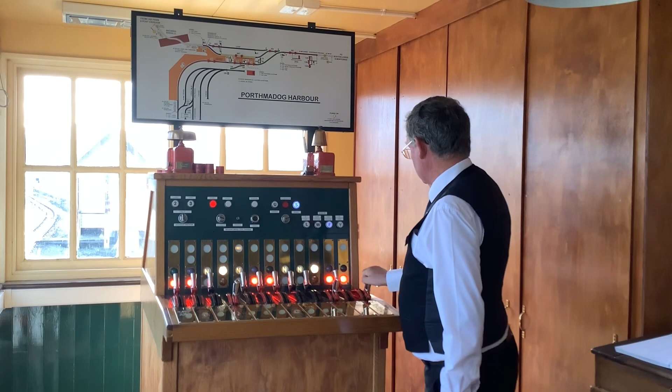Here's an L frame, miniature lever frame, all electric lock. There's no mechanical locking in it. So where on most lever frames, especially full-size lever frames, there's mechanical locking between the levers, on this frame all the locking between the levers is done electrically.

It's a 12 lever frame, part of the frame from Darlington North, which is a very big frame. We got donated it by Peter Burke. Actually turns out that it was 3 separate bits of the frame. The top bit, the front bit and the back bit were from different parts of the frame. But it's made by Westinghouse and it's made out of constructed parts, so it's kind of like a giant Lego set. You can assemble it in whatever configuration you want.

So as on any normal lever frame, the red levers are the signal levers, the black levers the point levers, and then we have one brown lever which is for releasing what we call Spooner's ground frame down at Spooner's. The points here are all electrically worked. And the points down outside Spooner's are so far from the box, and with people on the platform and trains in the platform, there's no way we could see anyone standing in the points. So the points down there are worked by the loco crew and we just give a release to the ground frame.

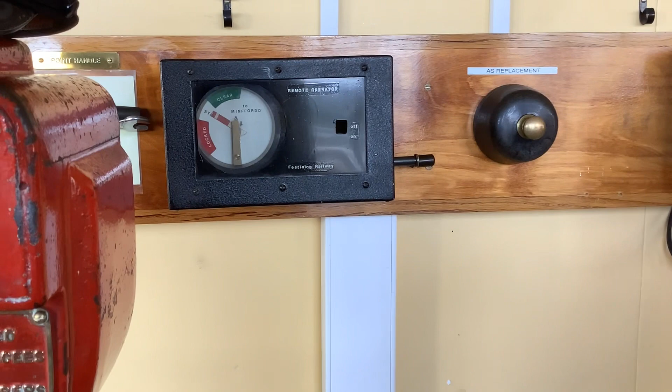The controls for the ETS are traditional overhead copper network communication. So there is overhead cadmium copper lines from Boston Lodge to Minffordd, and there's underground cable across the Cob. And then, rather than it being signalman operated, because the FR's always disliked signalmen because they are difficult to get and expensive, as much as possible the railway is designed for train crew working.

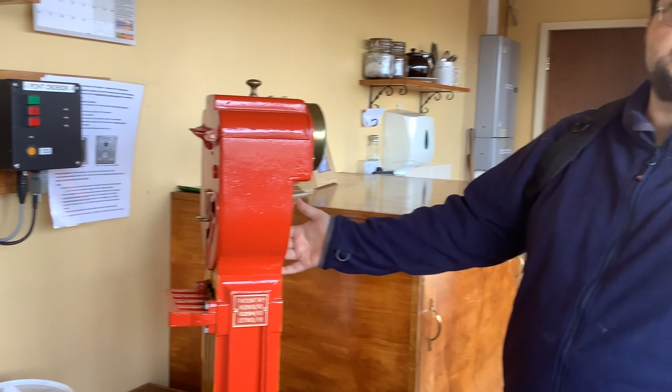So can I wind your remote operator? Yes. So you wind the remote operator, and it gives you an indication as to the state of the sections. It's locked at the moment. And that's how we've done it for the last umpteen years. And then the instrument for the Welsh Highland Railway to Pont Croesor is effectively the same style and principle of operation. It's just the communication between here and the next block post is digital, using a system called micro ETS. So it's got a push button panel instead.

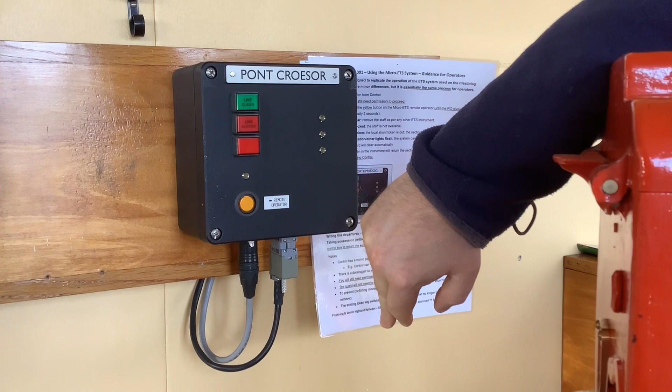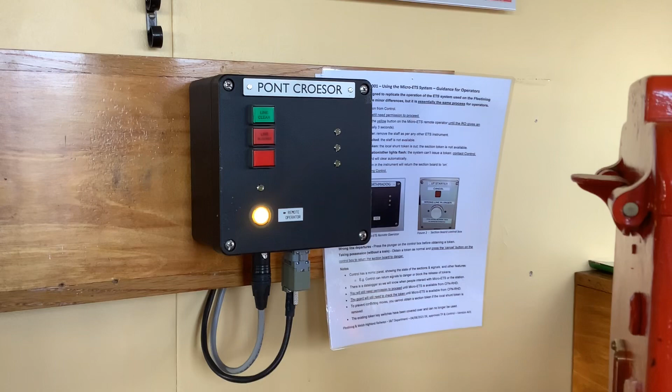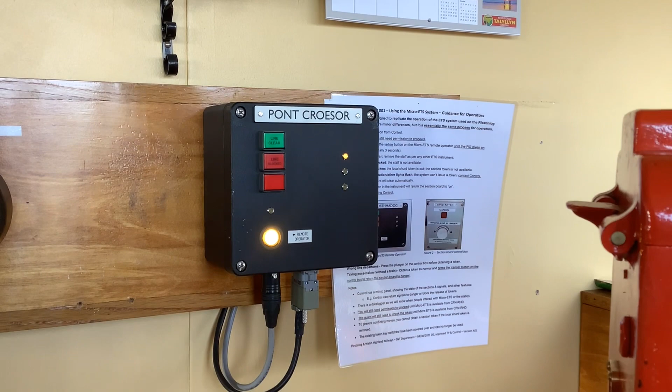So if you press that button, 3 seconds. Is it 3 seconds? It's been a while since I had to do this. And it's not saying anything at the moment. Do I need to press it again? Wait, there you go. Something broken. It should say line blocked, but it isn't. There's a communication error on that section.

So this is the repeater panel for the micro ETS system. Just take the phone out of the way. If I go there, I can get around it. We'll deal with this in the edit.

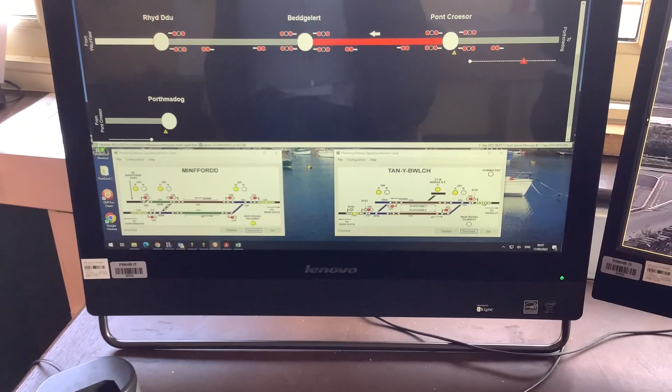So you have, is it Tan-y-Bwlch? That's Tan-y-Bwlch and Minffordd. Those are the repeater panels for the automatic stations. Right. So that's a traditional RRI system, but Tim, when he was a student, built a monitoring system, for which he's then built a server-based version of the software, so you can actually see what's going on. You can play it back, so for fault finding it's helpful.

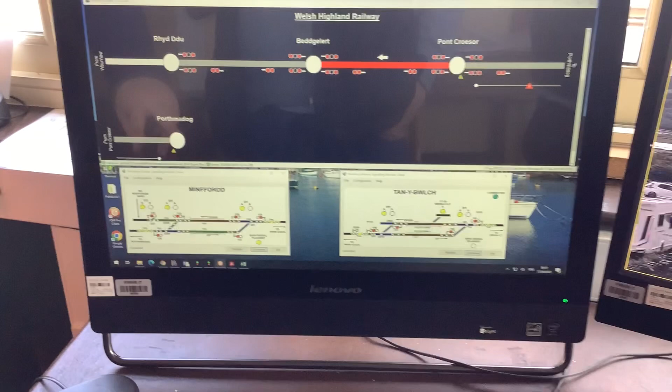So those are just the mimics of what's happening. You can see everything; they don't have to be open. It's literally the station works itself. Right. It's worked off track circuit operation and removal of the staff. And it's there from the 1980s. They're extraordinarily clever. And then this is what micro ETS is doing. That's the token sections of the Welsh Highland. Because it's a digital system, you can build a monitoring system into it.

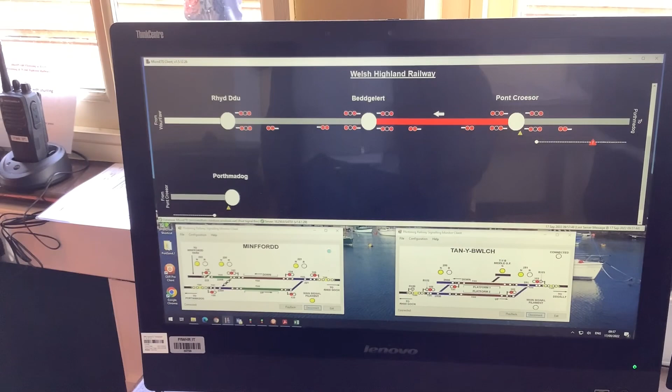Other things to draw your attention to on the block shelf. This is an override key for Britannia Bridge, which a train struck. In the event of a fault with Britannia Bridge, you can basically override the track circuit. And then there's a relay room power indicator, and this puts the advanced starter back. You can also put the advanced starter back by putting the staff back into the instrument. It puts the signals back. And you can also do it if you're trying to token balance while the train's trying to leave. So we don't do that.

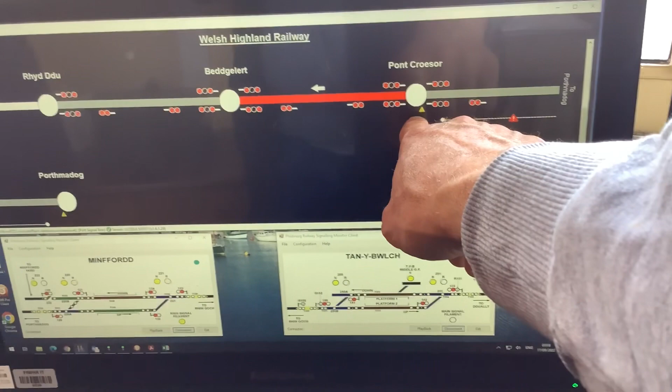So that's showing section occupancy, but it's also showing the signals at Beddgelert and at Pont Croesor, so they're at danger at the moment. So these are the signals that were technically coming into the other track, and those are the 2 tracks showing out. Yeah. Yes. They are slightly odd symbols because the ladybird symbols are a red light top and bottom.

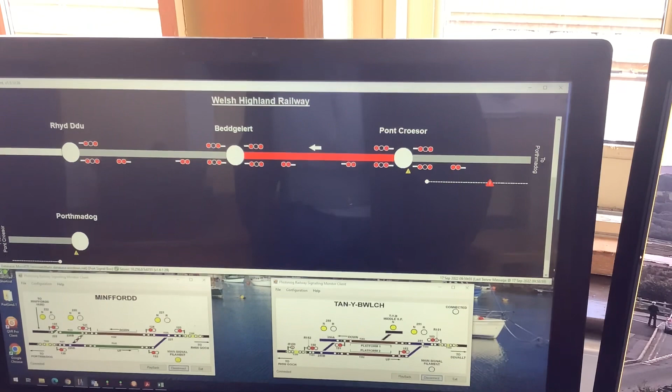Yes. So that's showing you that there's some communication error on one of the 2 pairs, and the caution is, I suspect that means that it's lost comms for a bit, right? So let's hope that there's not a train that wants to come back and use that section. Otherwise, Tim's going to be getting the magic key out and doing things. No.

Back on the inside. Phone control to let them know that it's back in. Signalbox, Minffordd token's back in. Thank you. Cheers.

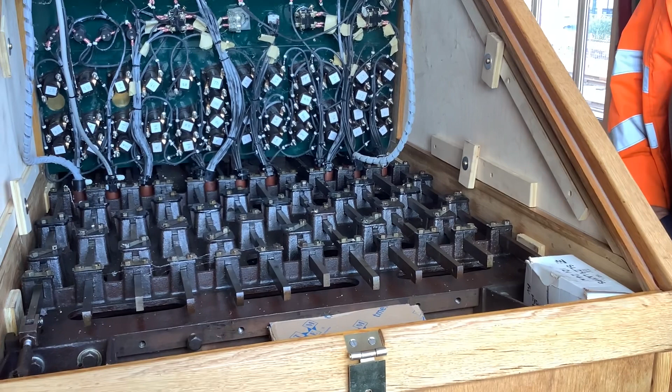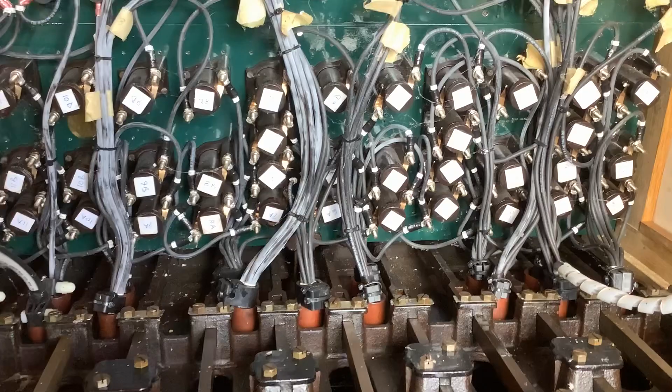See what you mean about having to sit the contacts on the end. Yeah. Yeah. Do you want to take a look? I'm not going down there. You know, you might stay there.

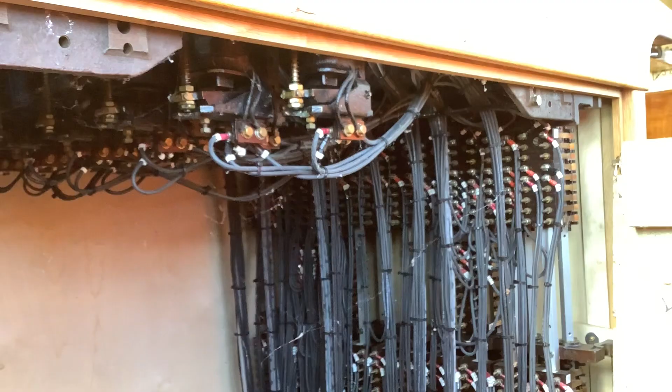Peter said we don't have both electric locks that you'd normally have on the frame. You'd normally have the track circuit lock and the interlocking lock. Yeah. And the interlocking lock would be in a red can to show that, because they used to have somebody in the box who could go and release the track circuit lock in the event of a problem, but the red can said that's the interlocking lock, you can't pick that.

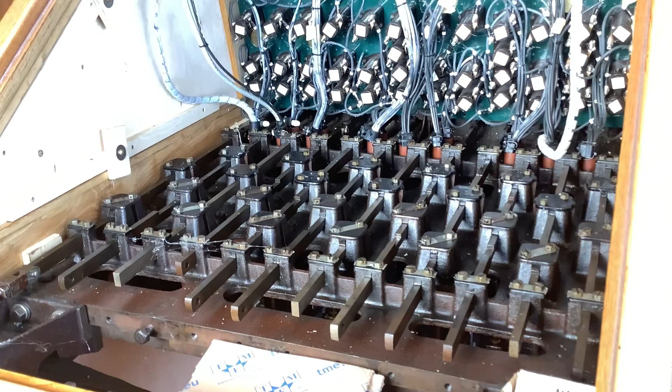We decided, when we went to having just one lock, we wouldn't fit the red cans to them because it's already in a lock cupboard that only S&T can get to. And if you do have to pick a lock and disarrange, you're talking to control, the A-class controller, anyway, so what's the problem? To set the points for the Welsh Highland platform, we've got detection on them, at 10 and 12.

The guy who came up with this was a guy called Alan Skellen, who was one of the S&T staff here for many years. He started on the project, and unfortunately he died right at the beginning, which was terrible and inconvenient because we had to do a lot more work, because he had so much expertise that we could have brought to the thing. He died really tragically for want of a carbon monoxide detector. It was really very sad.

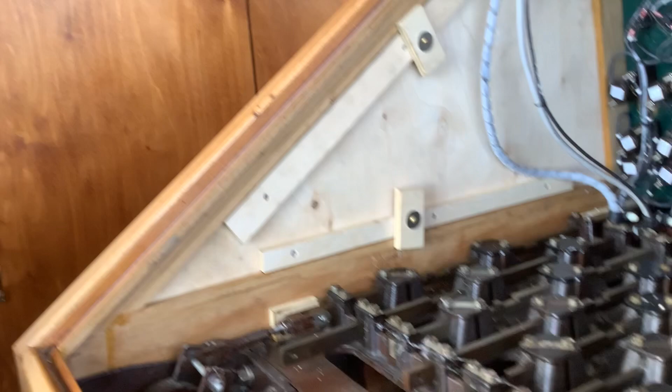So I like to think of this frame as actually being, we're going to get a brass plaque for it, I've just never got round to it, which is stupid really. But this is sort of a memory to him because he was the prime mover behind this, and when he died it became Peter who did an awful lot of the work and an awful lot of the painting, and in fact quite a lot of the frame existed in his garage for a very long period of time. Well, Alan was refurbishing. Cobwebs here.

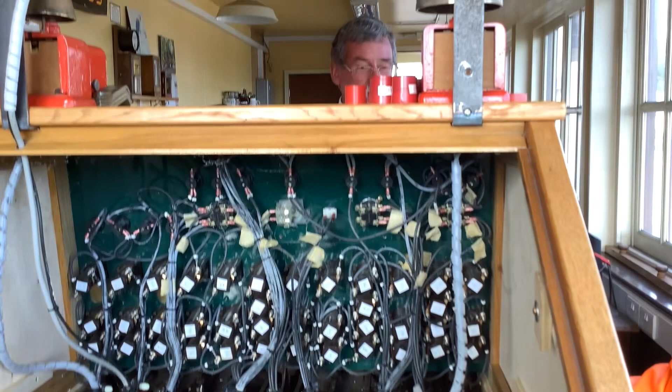Alan was refurbishing the frame in the workshop or one of the sheds over at Boston Lodge, but it wasn't very watertight. It wasn't very warm. Didn't have much good lighting. So he took over my garage in Porthmadog. I was just round the corner from him. Got heating and lighting and whatever. So that was quite fortuitous.

He'd got to the stage where he totally disassembled the frame and had started refurbishing some of the pieces when unfortunately he died. So I took over the rebuilding of the frame after that, all done in my garage. Mr. Wilson.

Draw lock. Leave it open there so I don't lose it. Check the starters cleared. And they clear the starter signals. Would you mind terribly if I slightly corrected you there, Sam? Check the starter should have cleared. It doesn't tell you it actually has.

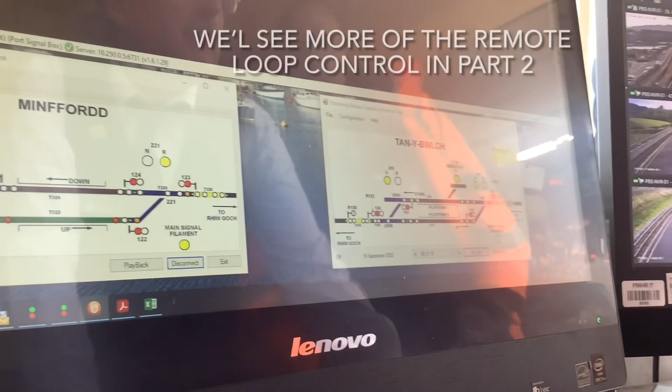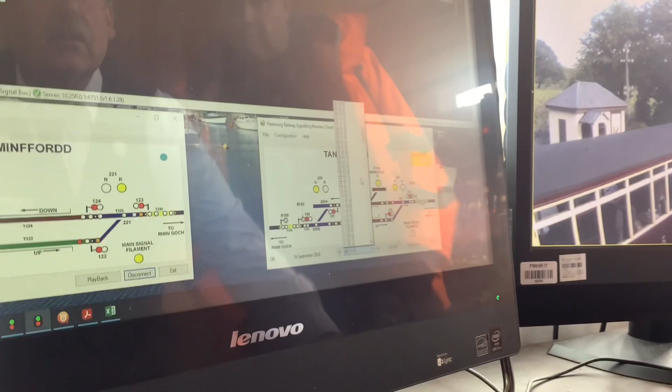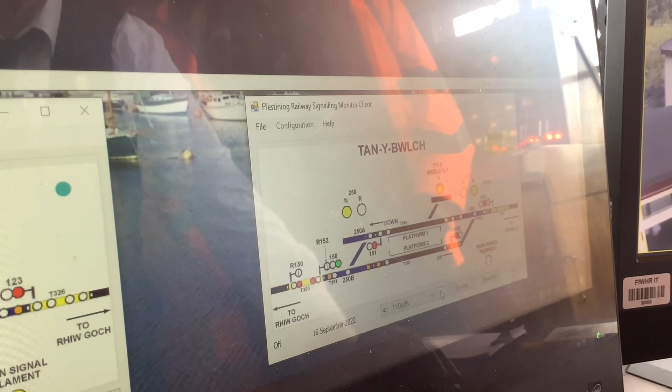If we do playback, there should be a train arriving. Oh, yeah, you just see them come over the end. That's it. Step through the playback, you can see the home signal clear, the train runs into the station.